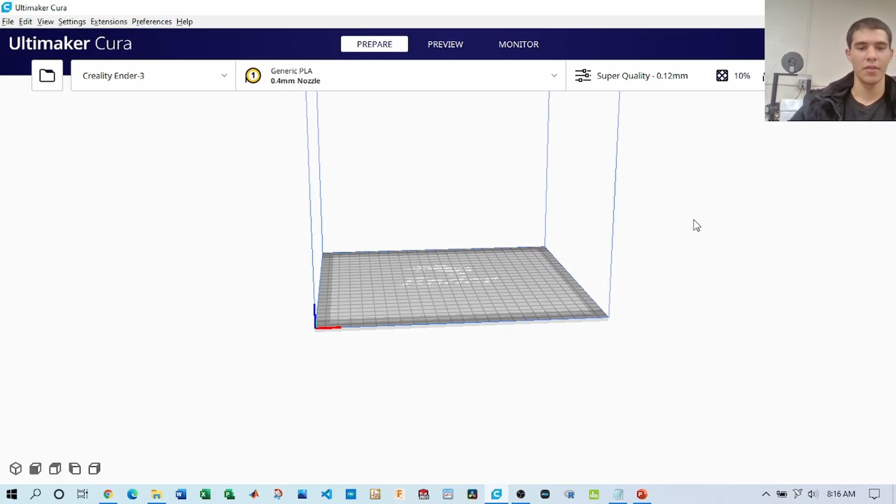So if you want to 3D print something like the 3D prints I have back there, the Ender 3 Pro, then one thing you can do is learn how to 3D print. And before you do that, you've got to slice your files. The way slicing works is you use this software, and as you print by layers, it's going to discretize the voxels at which you print.

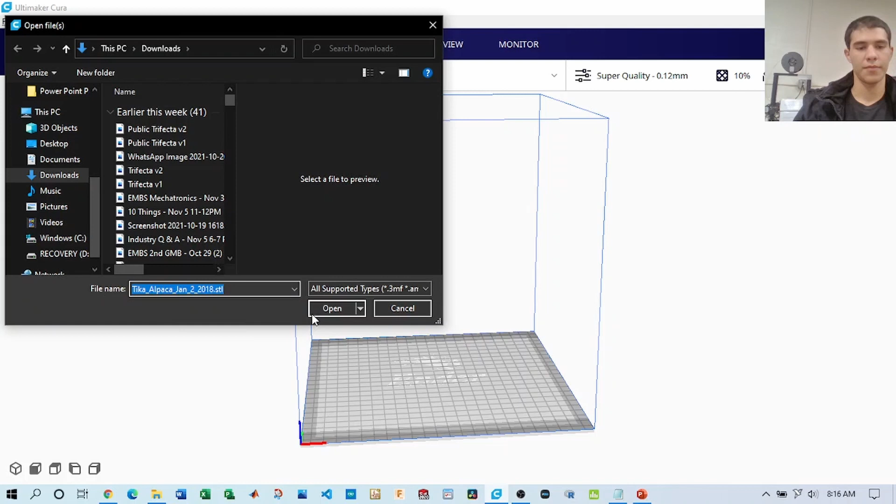So let's go ahead and slice something up. Usually you need an STL file or another neutral formatted file. Once you have your file, it shows up here. You can look at the different planes, orientations, and use your mouse to click and drag to position it.

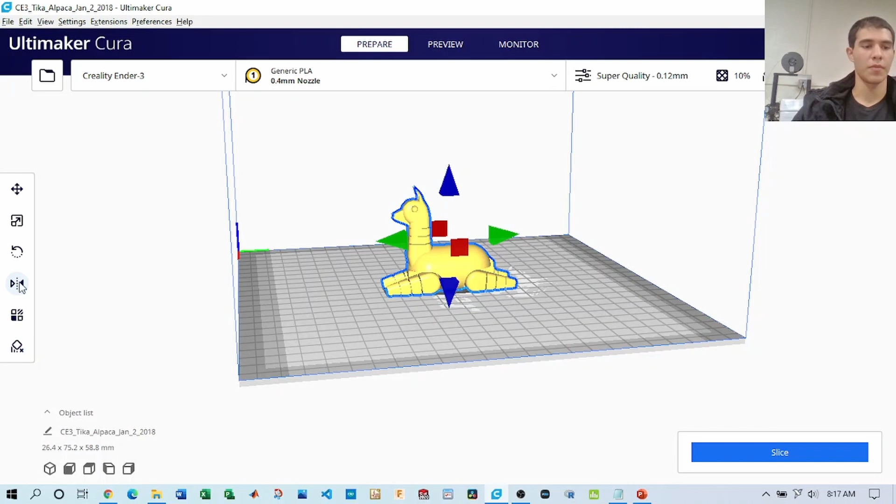You have different features here in the left-hand tab that allow you to add supports, mirror the parts or features, and scale it. So we're going to scale this to make it smaller. Let's try 50% smaller. Let's go ahead and slice this. So it's 1 hour and 3 minutes for this TPU alpaca benchmark print, and it's about 3 grams.

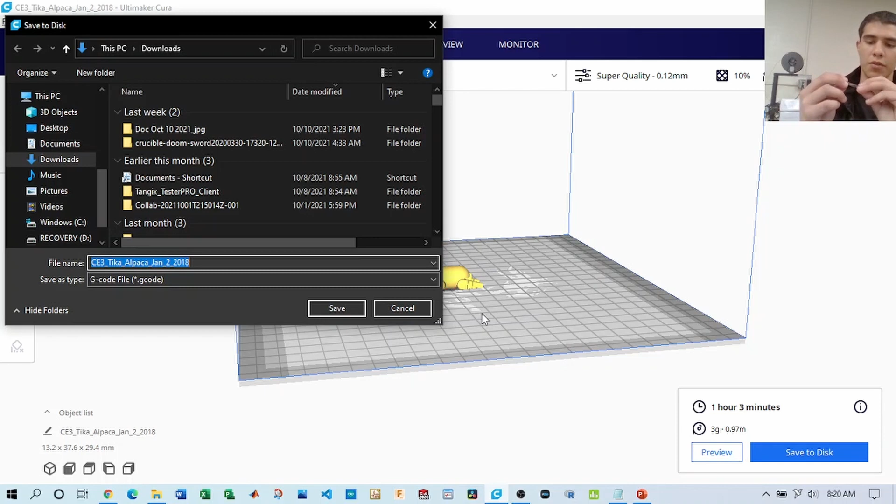Once you have your sliced STL, it's going to translate that into G-code, and we're going to use this G-code to tell the 3D printer where to print in space. This will be an SD card, and the adapter will be one of these. It has a slot for the micro SD card, which is smaller, and it goes into the SD card adapter. Then we can take this adapter with the micro SD card inside and take that over to the printer over here.

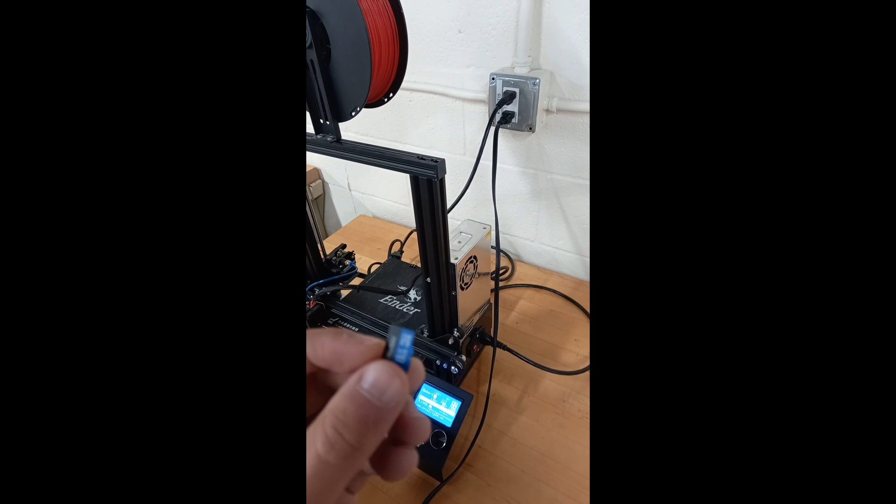The main gist is that you turn it on over here, and you can customize your settings. I already have it set up for PLA, and loading PLA and ABS or other filaments would be for a different video. In this case, this would be your micro SD card. So you want to put this micro SD card in the slot right here, and it would read the slot.

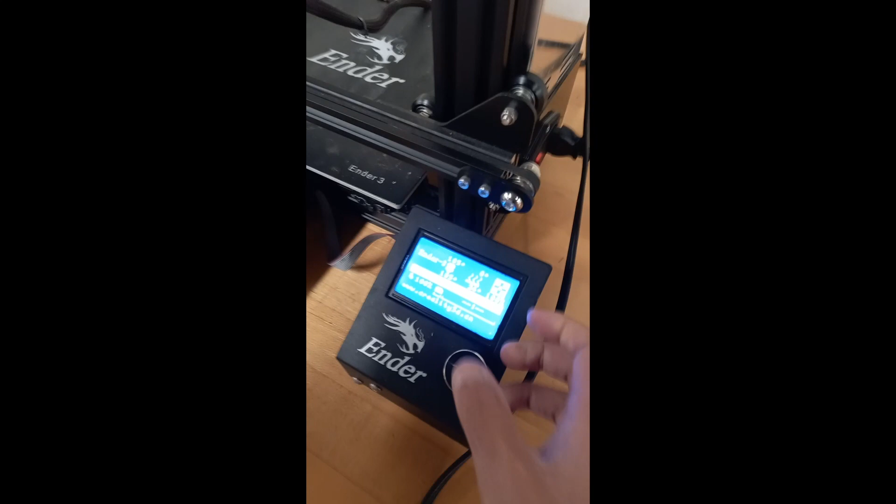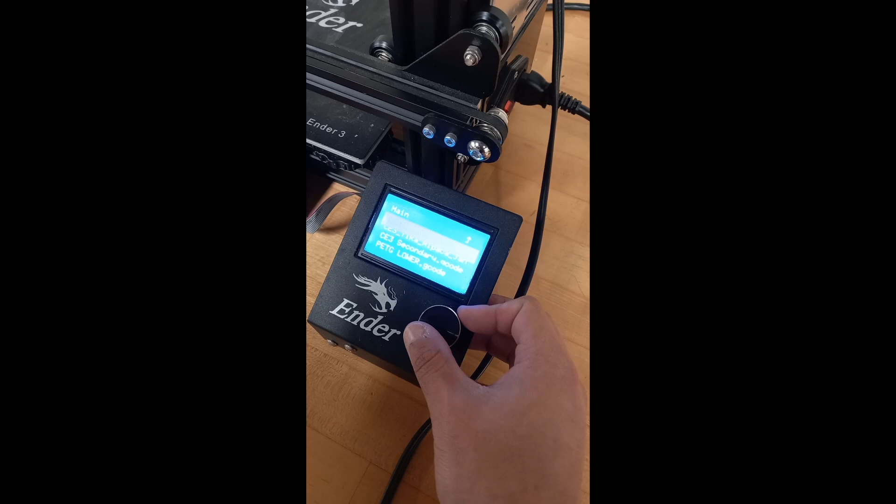Then you go to your settings, you initiate the SD card, then you can print from the SD card. So we'll go ahead and find our file name, TPU alpaca, and then you would start the print.

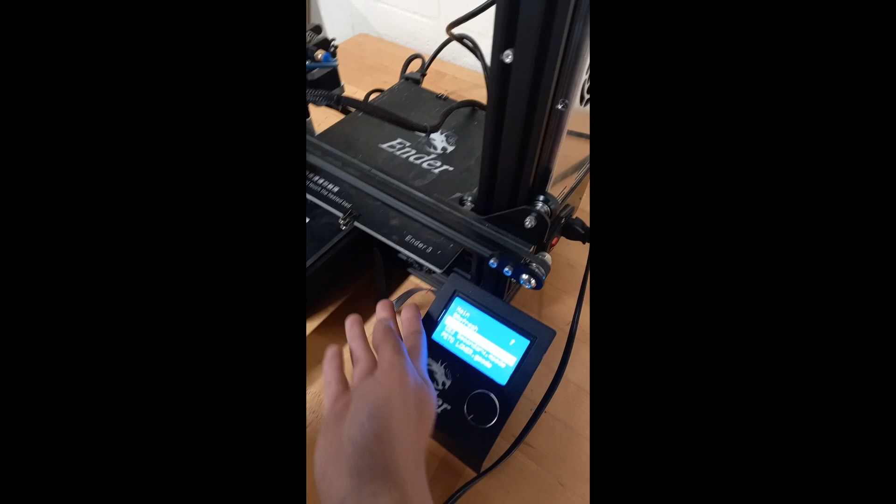I've already calibrated the 3D printer to adjust for the leveling. So you have these knobs on the side, and these knobs allow for manual adjustment of leveling, because you want your printing bed to be leveled. So let's go ahead and initiate the print.

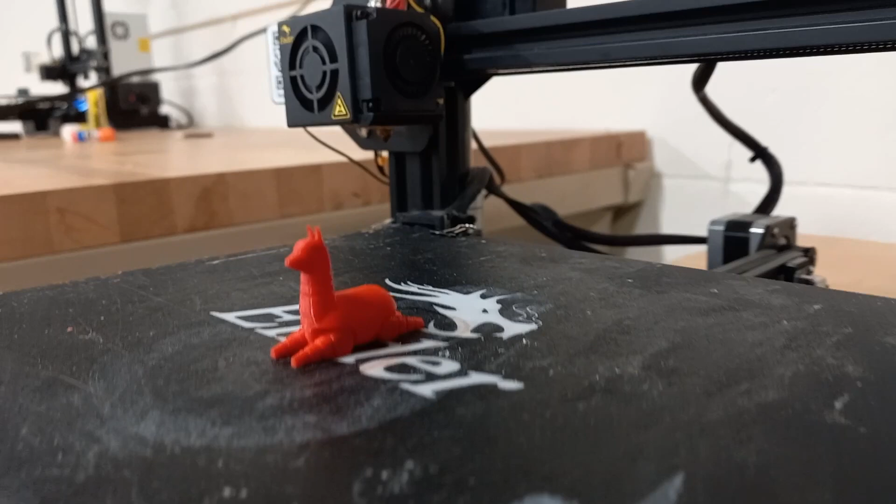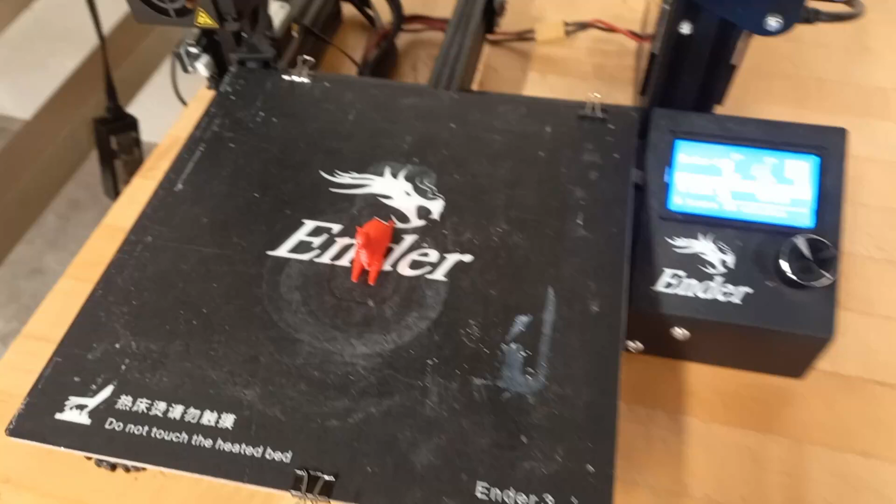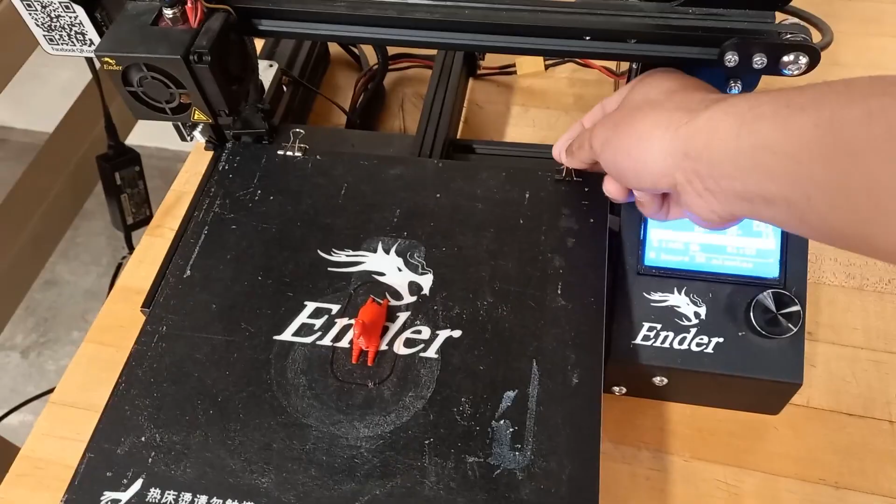So now that you have your printed part, what you want to do next is let it cool down, or right away you can get a spatula. Disengage the clips, and you have the clips. You put it on a flat surface, you grab your spatula, and in this case you're just going to wedge the part off.

Now the part is off, you wedged it off with the spatula. And that's pretty much it. That's how to 3D print something.